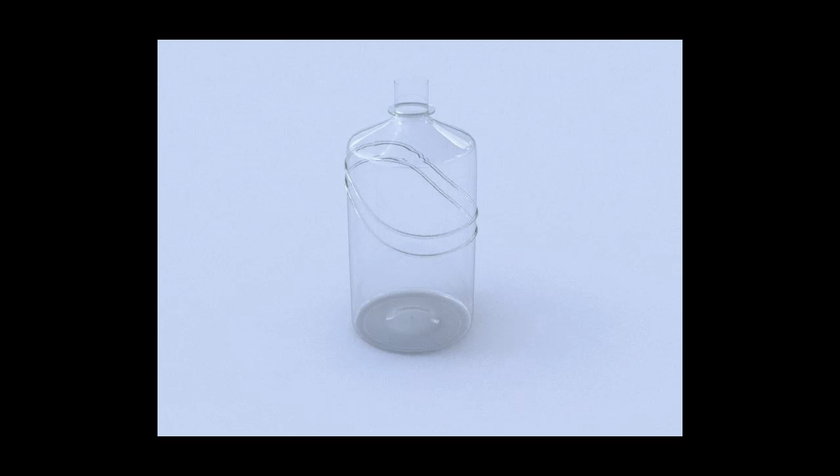Hi everybody, this time I will make a plastic bottle and some details into the side, using Revolve and Project commands at least. So let's start.

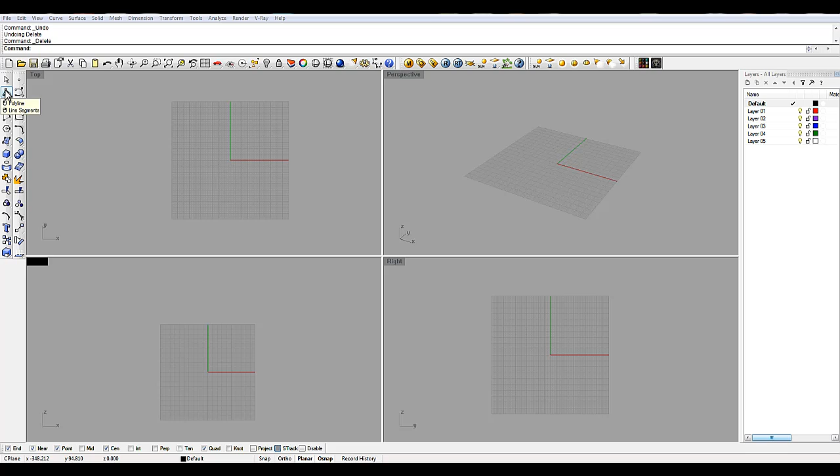Let's go into the front view and let's make reference lines. The height of the bottle will be 200 millimeters, and then we need the cap for the end of the bottle. I think 25 millimeters is fine, so let's put 12.5 here.

Okay, then we need a reference line of how wide the bottle will be, so I think it will be 10 centimeters, so let's put 50 here, like that, and press enter, and now you can lock these lines, and we can start making the lines. So let's start from here.

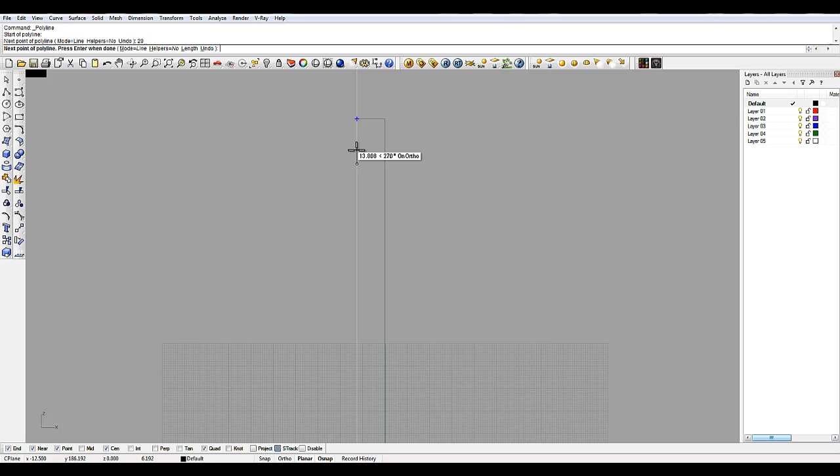So the neck where the bottle cap will be, I think 20 millimeters will be good. So press 20, and then the shoulder, or the end of where the cap will be screwed, I think it could be something like 5 millimeters. Of course you can use your own measures and make the bottle as wide as you like.

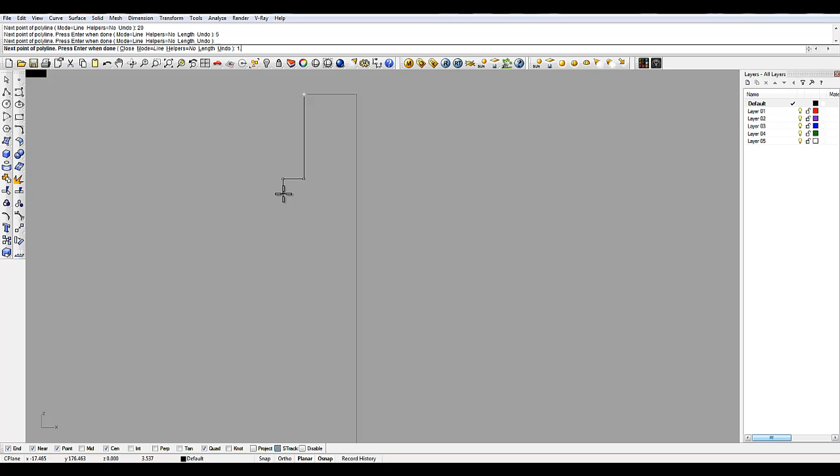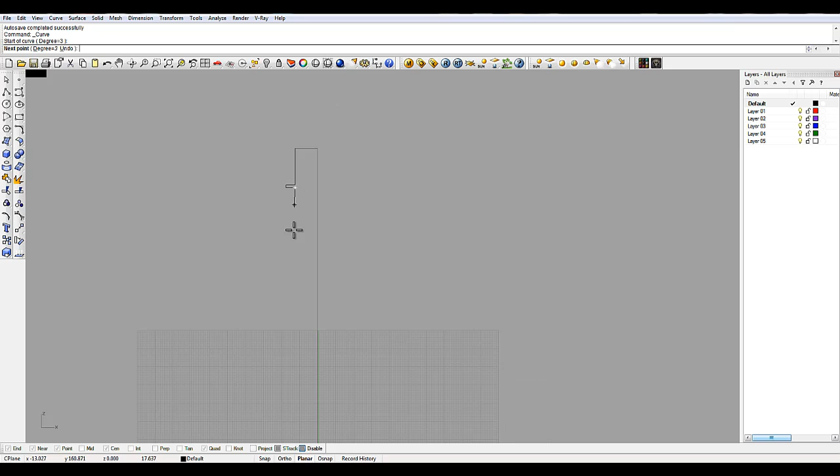And this part could be something like 1.5, like that. Press enter, select the control point curve, and from the end disable the snaps, and press shift for the first point. I think I'm going to make a very hard shoulder to the bottle, so maybe something like that.

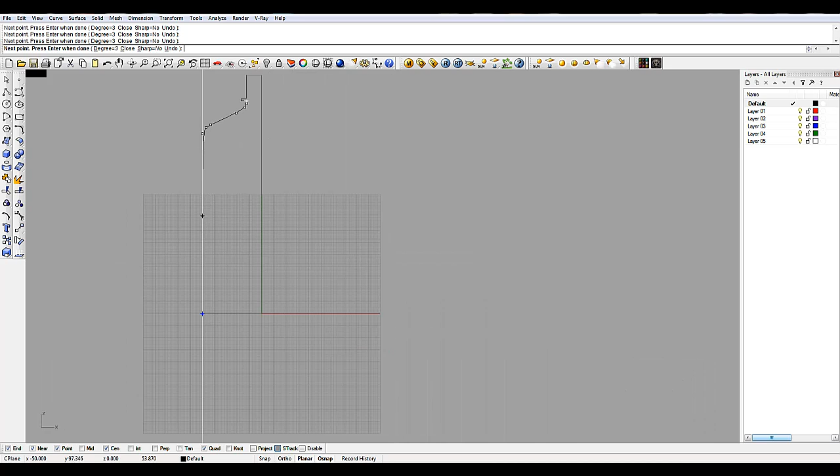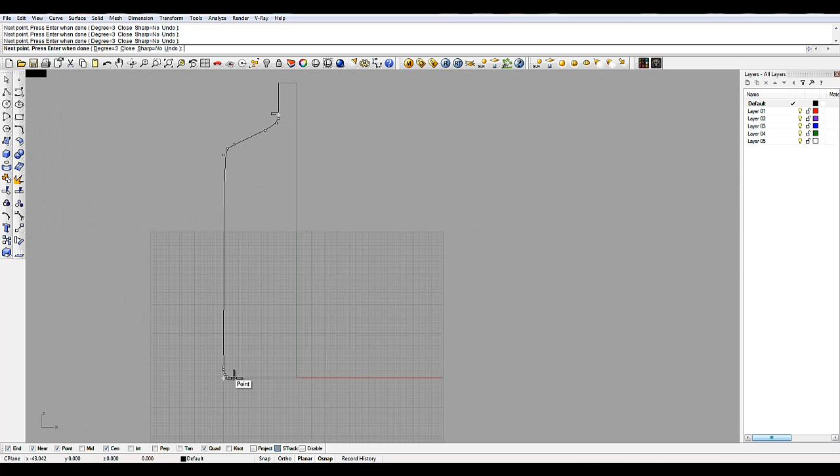If you have some bottle pictures you want to make, just use them. It will be much easier to make the shape. So I want a nice curve into the bottom, into the corners, so maybe something like this. This bottle will be ugly, but it's not the point of this tutorial, so I don't mind.

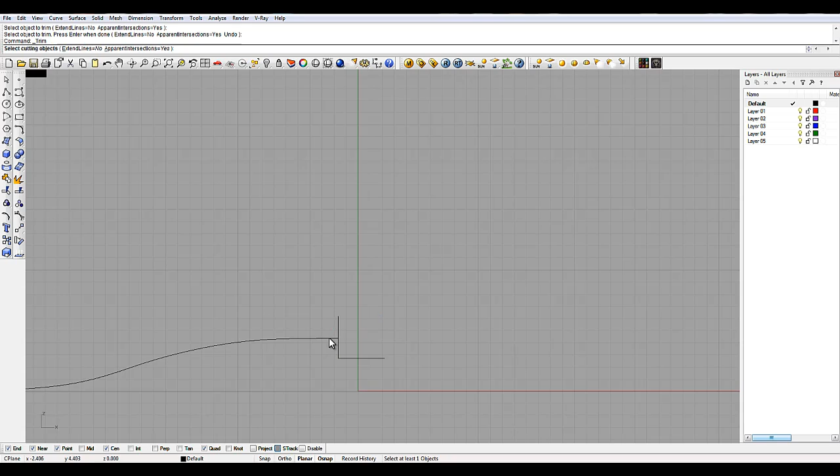Then you can make this detail which is related to the processing of the bottles. So there is this shape at the bottom of the bottle. I press shift all the time now, like that, and let's make maybe something like that. Then let's use trim. And again, like that. Oh yeah, we have to trim this one also. Okay.

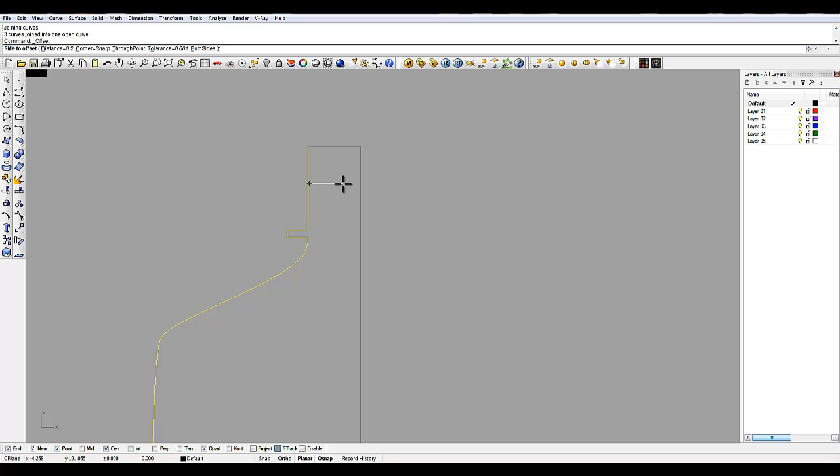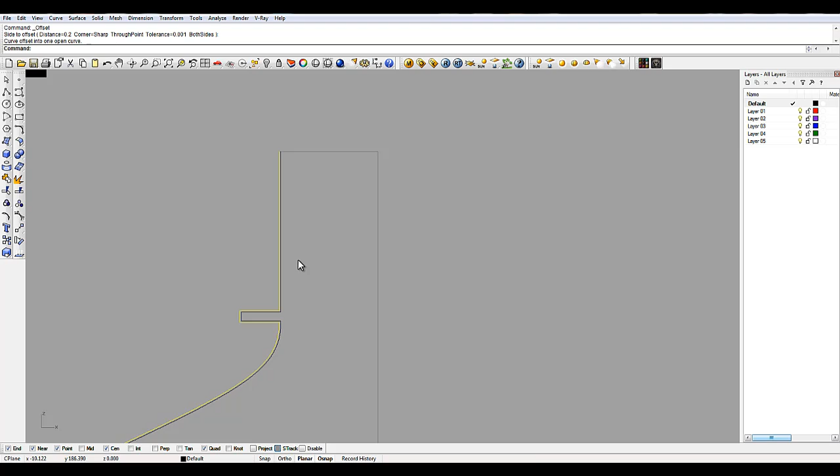Let's split this end off here and join these all together like that. Then select curve and offset curve, and if you want to make a really stiff bottle, use more distance, but I think nowadays plastic bottles are very flimsy when it comes to the material stiffness, so maybe 0.2 is enough. You can make a more stiff bottle if you want.

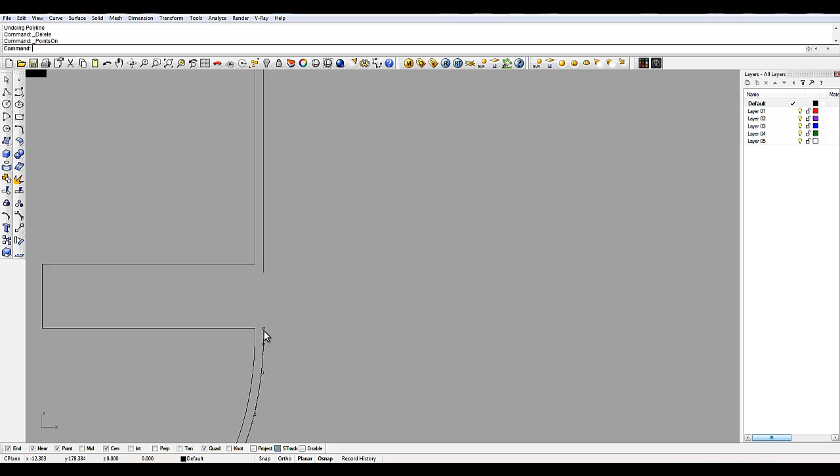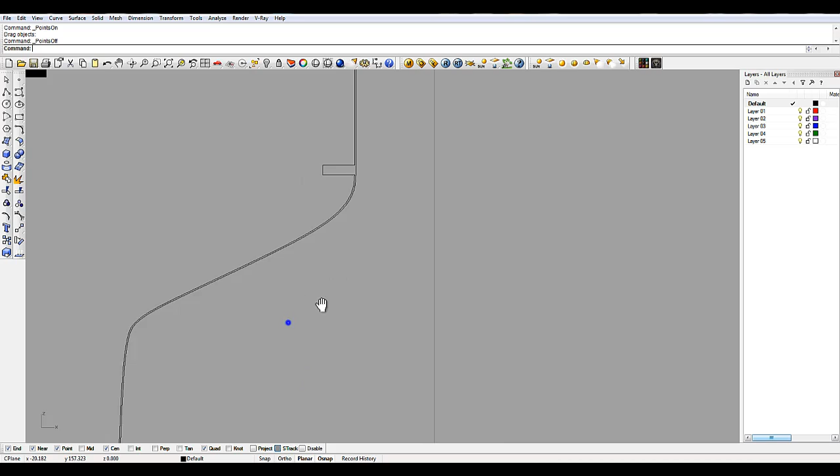And then we are going to explode this one and delete these, because this piece is solid all the way. The shape doesn't follow from the inside into this part. So let's see. We could also rebuild this, because like you see there are too many points in here. So maybe 50.

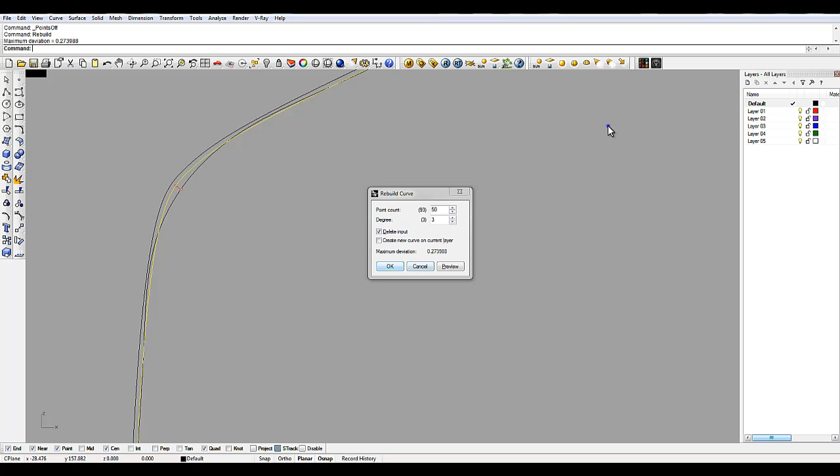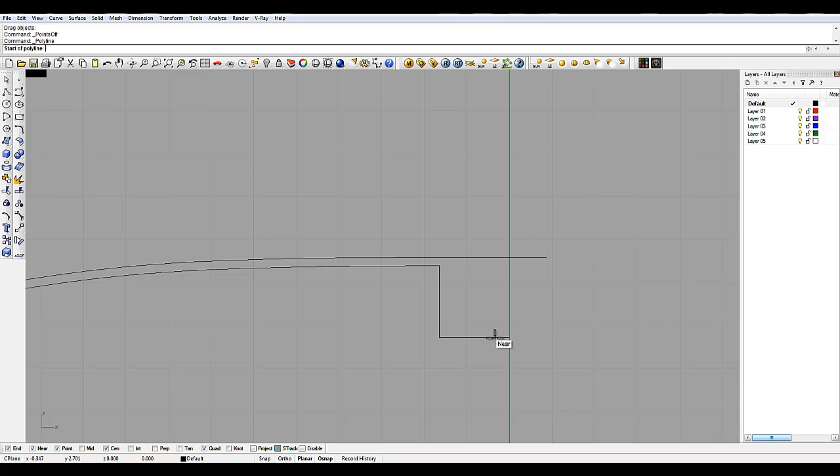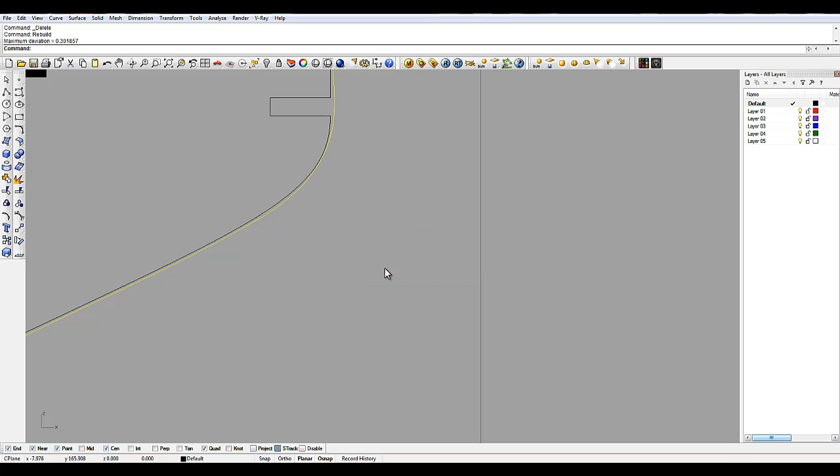And delete these ones first. Okay. Drag this last control point and split it like that. So now we use the rebuild command, and okay, let's try this. Maybe this 50 is okay. Then we can adjust this control point here.

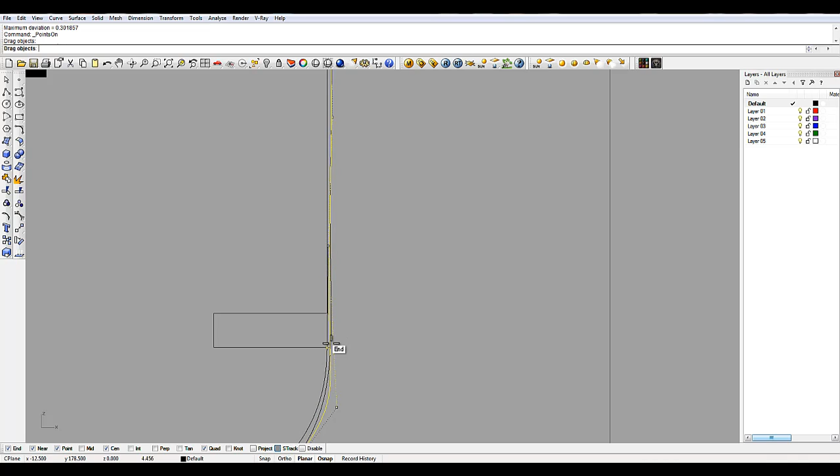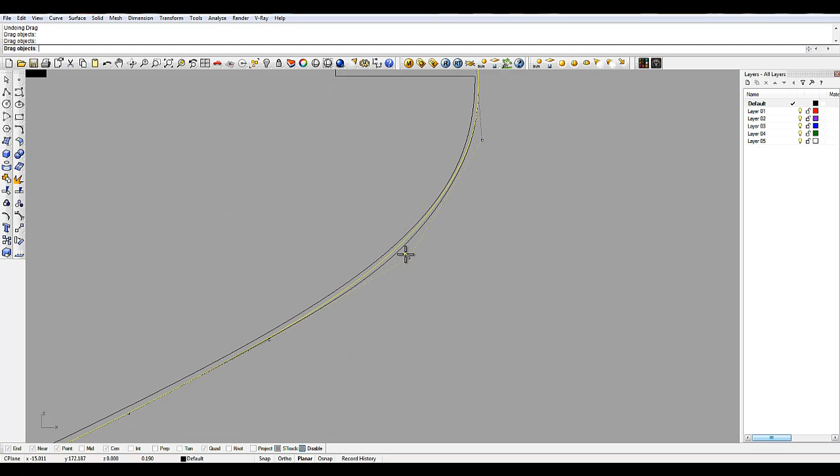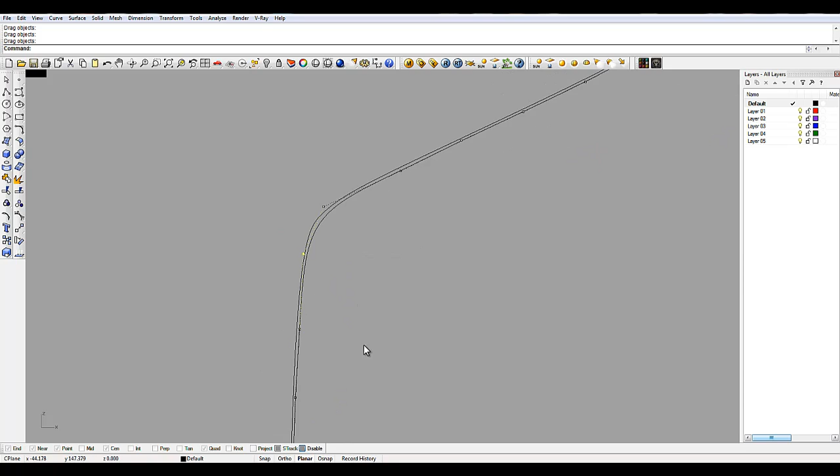So we have some problems here. Maybe it wasn't such a good idea. Let's not rebuild it. It doesn't follow the outer line so well if we rebuild the line, so let's leave it alone.

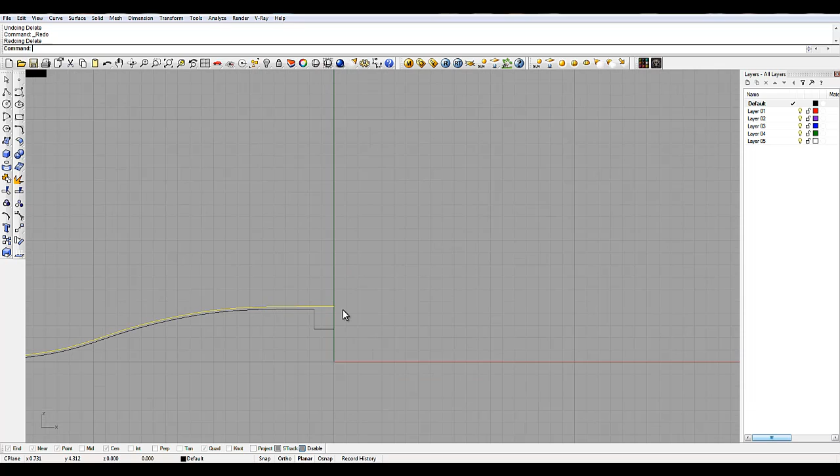So because of the detailing of the bottle, I think it's wise to make the outer surface and inner surface at different times. So let's select this inner curve and put it on a different layer and hide it, and put this here, and maybe we name this. This is not necessary.

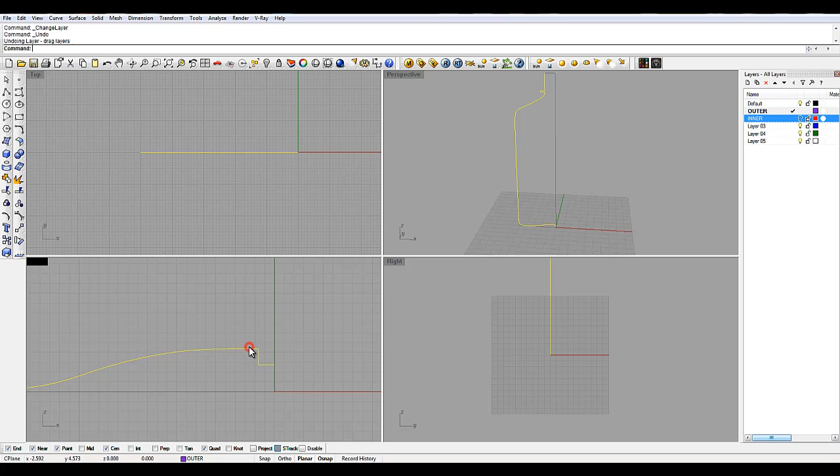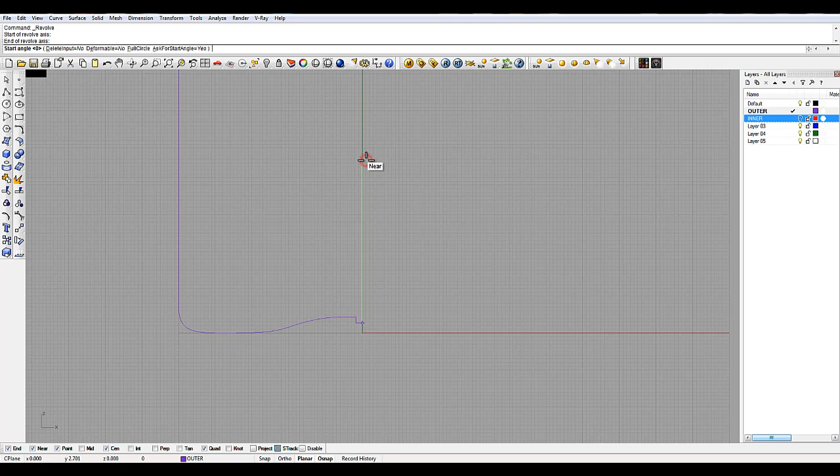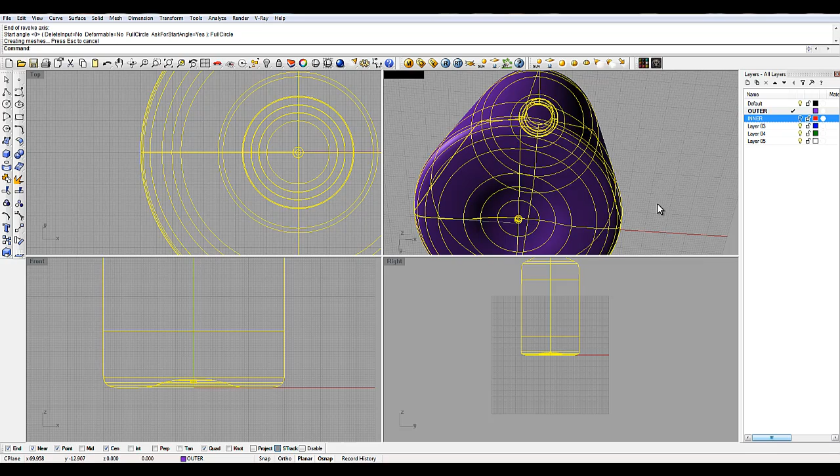So let's select this curve and use the revolve command and select the end of the line and shift and go up and full circle. There we have it. Not a very beautiful bottle, but it's not the point in this tutorial. So now we have this nice detail here. It comes when the bottle is extruded at the factory from a plastic piece. It leaves that little knot into the bottom.

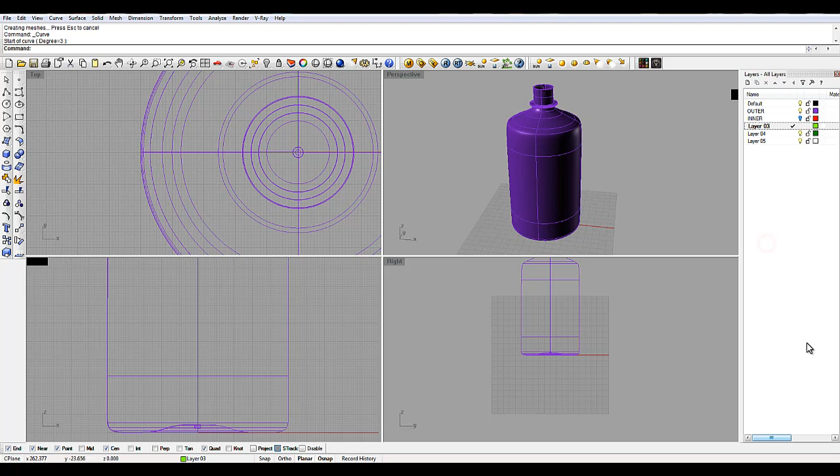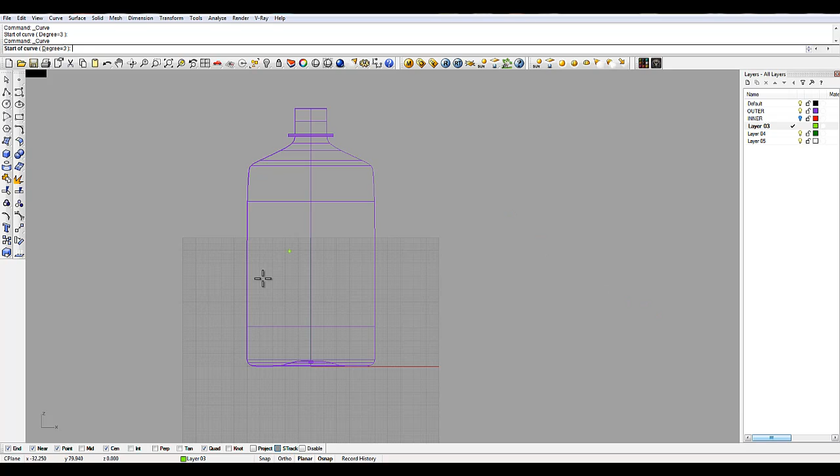So now we have the outer side and we want to make those swirls. Let's go into a different layer and again into the front view, and let's make some nice swirls. If you want to make a label on the bottle, you might want to leave some space here. So let's make a nice curved line here.

Like this. Maybe get that last point a little bit higher, like that, and then select the curve and okay, let's make two of these. I don't know the name in English, but swirl or swoosh or something like that. Maybe we could rotate this lower curve a little bit like this, so we get more of this wave look here.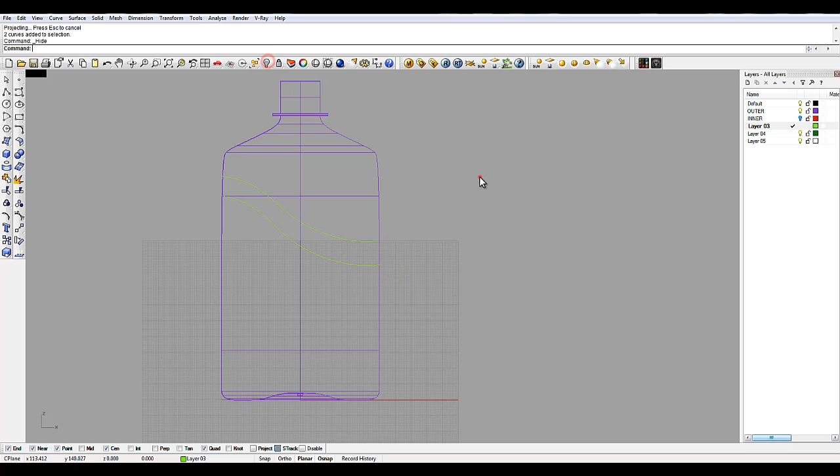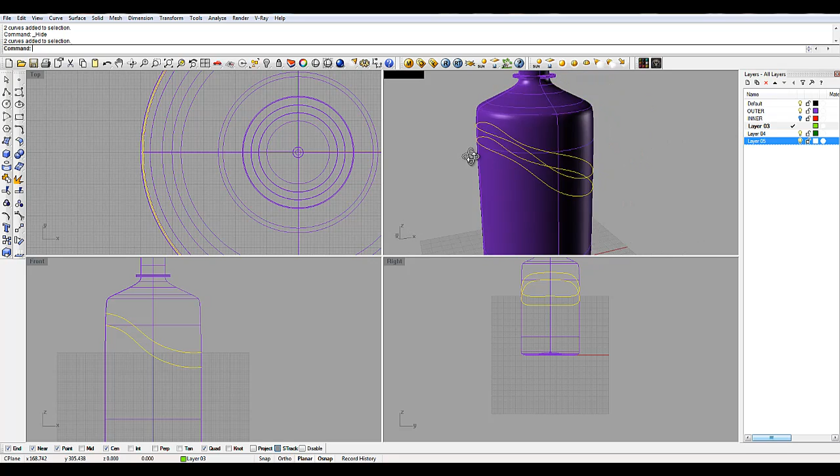So now you can select these outer lines and hide them, or make a garbage layer and move them there. So now we have these curves following the bottle side. If you want to make it more beautiful or something, you can move those curve points and then make the project command again. But now we are going to go forward and select these two curves and use solid and pipe. Oh, sorry, you can only select one, and it's your choice again.

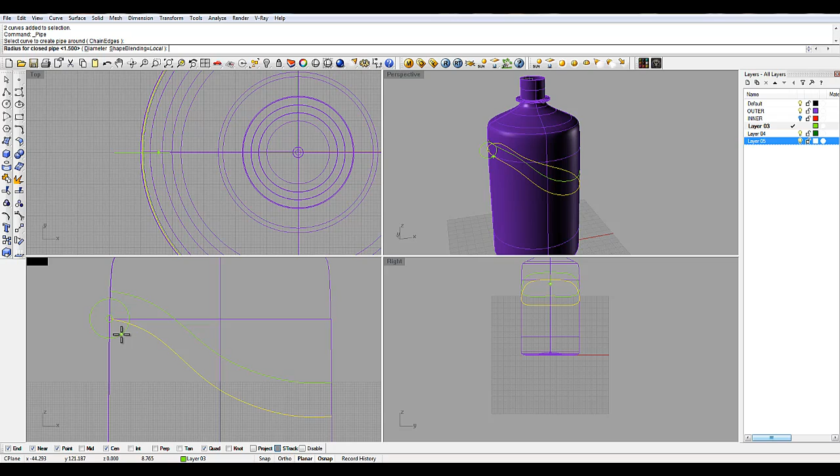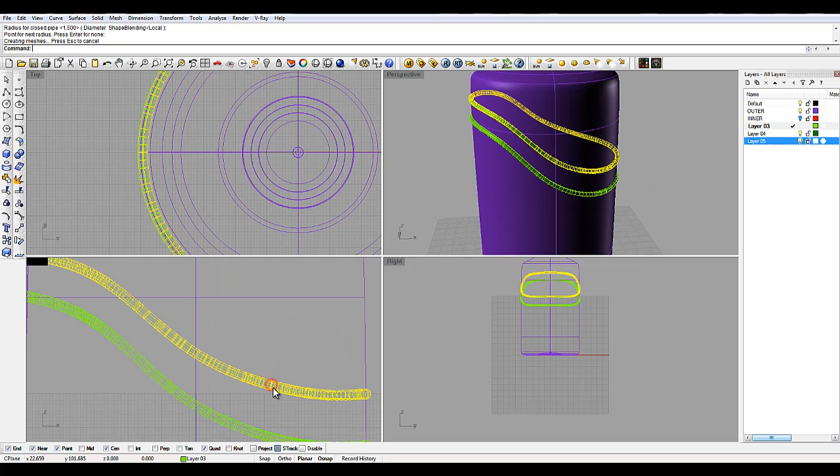I will use 1.5 for the radius for the pipe. Just press enter, and there you have it, the pipe, and mouse right repeats the command. Select the upper curve and just press enter. And there you have it. Let's select these curves and again hide them. And now if you would have made the inner surface in this point, it would be more difficult to make this next part of this tutorial. So we are going to use split command to split these pipes and this surface and then join them together.

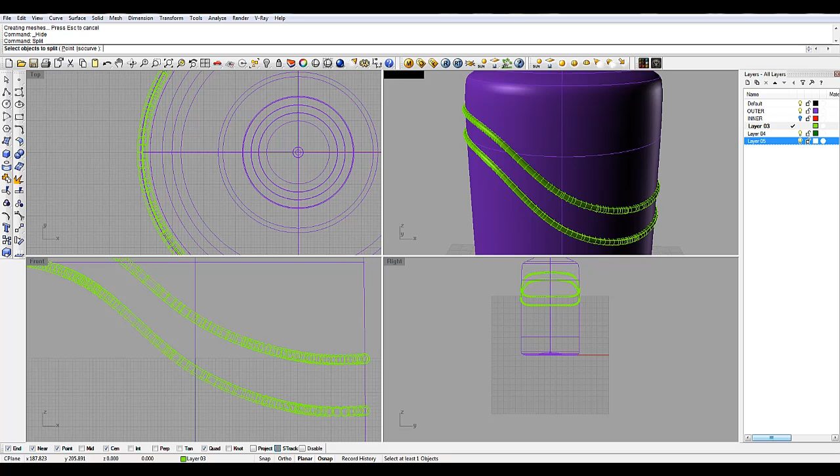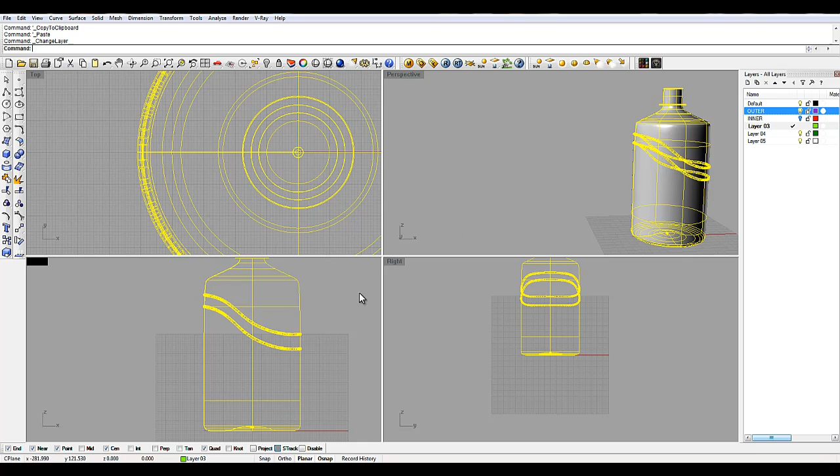So we have the pipes now. Let's choose all these, the bottle and the pipes, and copy and paste. Then move them into the white layer, and now we start splitting. So use the command split, select the green pipes, press enter, select the bottle, press enter, and do the same with the bottle. Select the bottle and then select the white pipes because they are still solid pieces, and press enter.

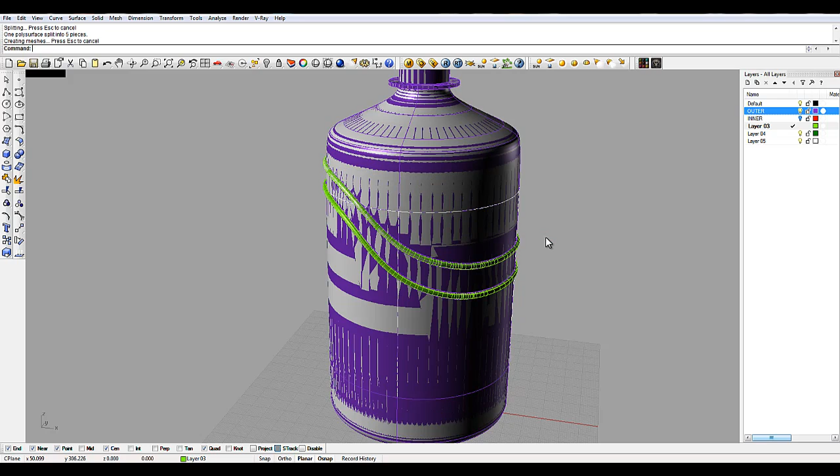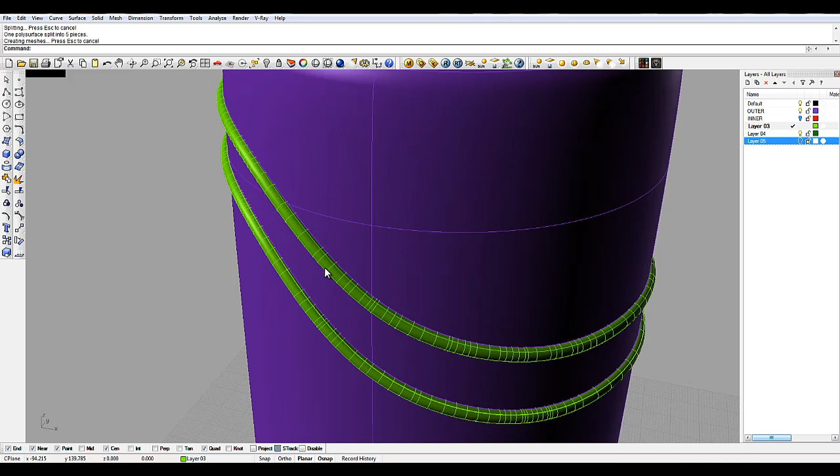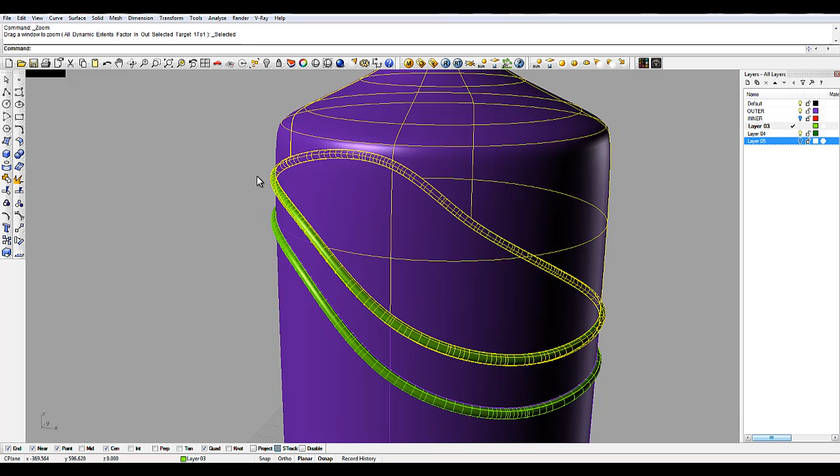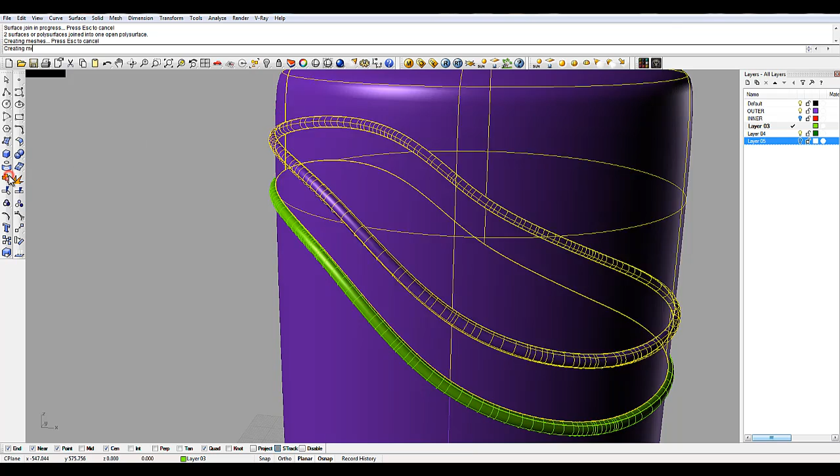And then you can hide those white pieces by pressing the layer off, and now we are going to join these pipes into the bottle. As you can see, they are now in pieces, so this is a little bit tricky, but I think we can manage. So select the upper pipe and the bottle and press join. That went nicely. Yeah. Then select the lower part and the upper part and join. And that's okay also.

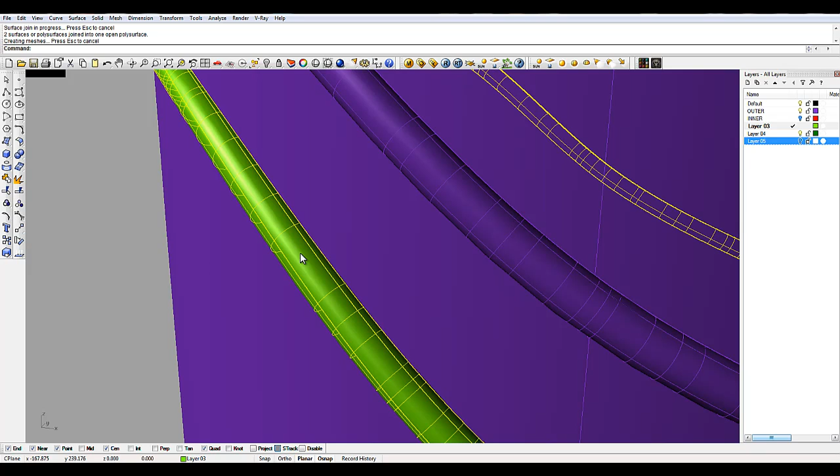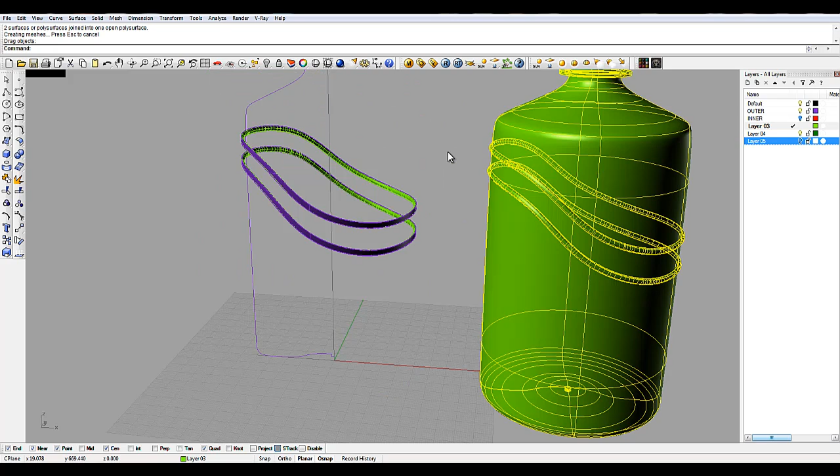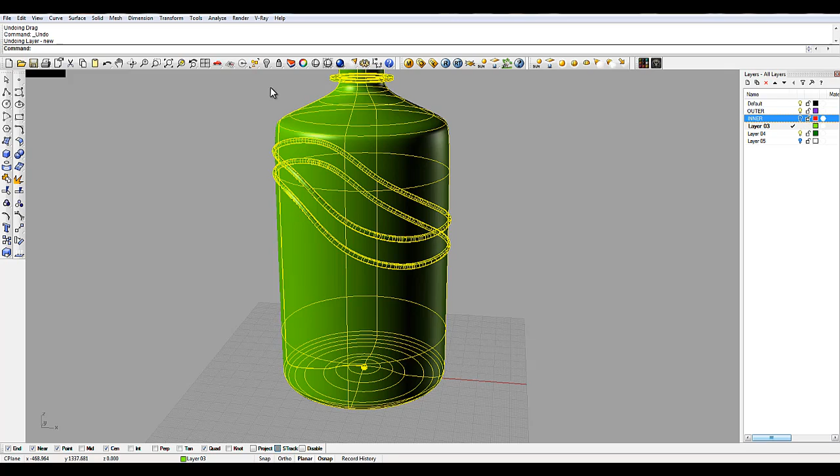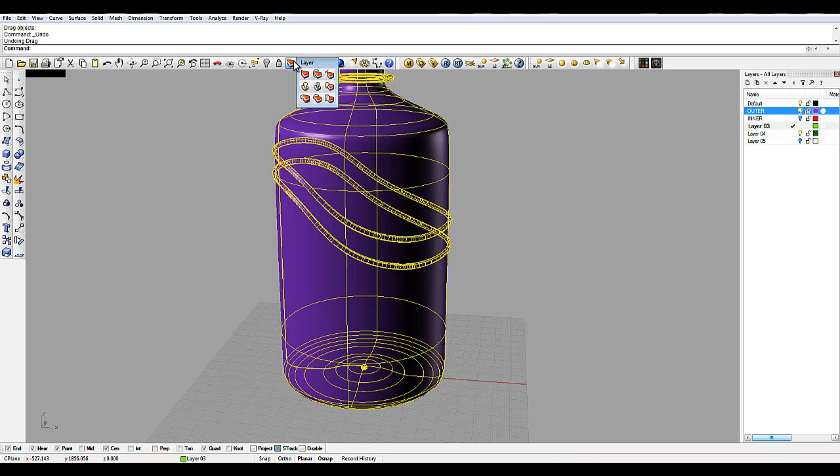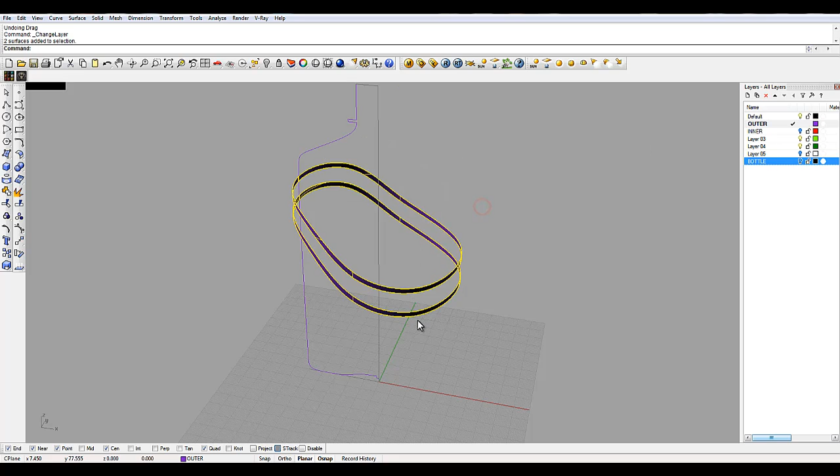We can make a... let's just move this bottle into the layer called outer, and we can delete these and, okay, there is some, so let's select this bottle and make a new layer, call it bottle. Okay, let's press OK and go into the bottle layer and, sorry, let's hide the bottle layer and select these pieces and delete those and hide that layer. And now we have to make the inner surface.

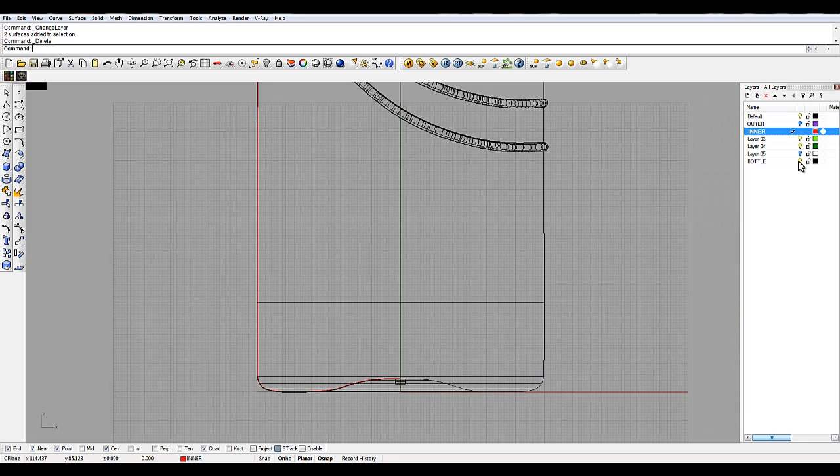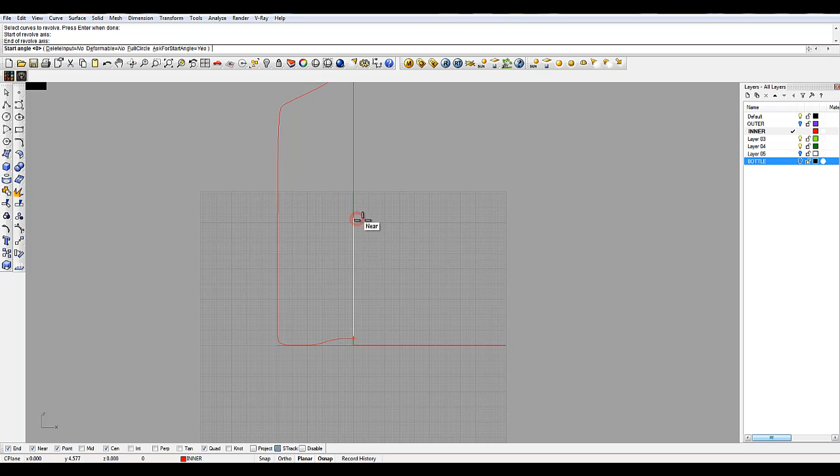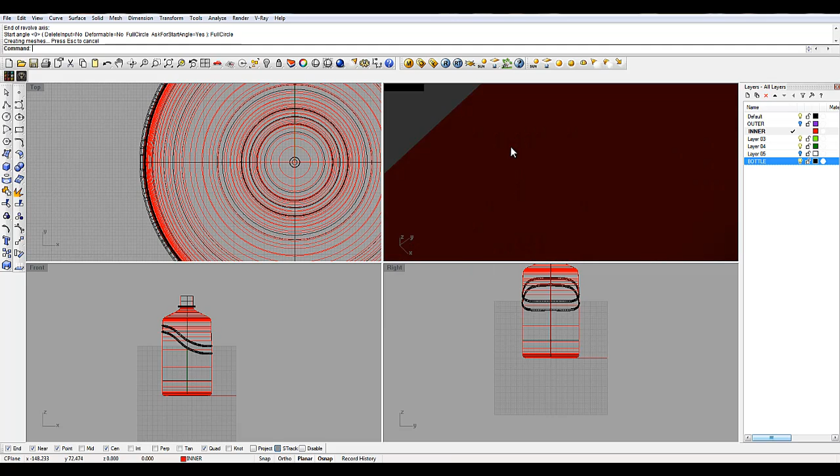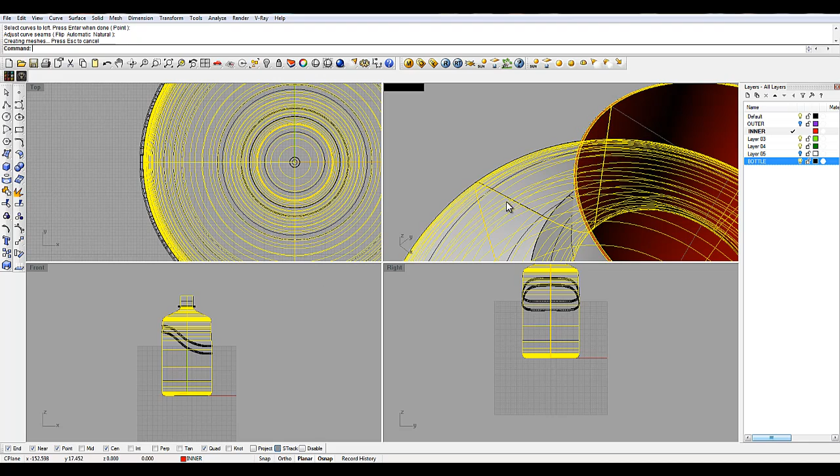So let's go into the inner surface layer and select the curve, and use the revolve command again from the end point and press shift and drag the mouse up and full circle, and there we have the inner surface. Put the outer surface on, the bottle on, and I think it should be fine if we just loft this part here. Okay, and select the surface and the loft we just made and the outer surface and join. And there you have it, closed polysurface.

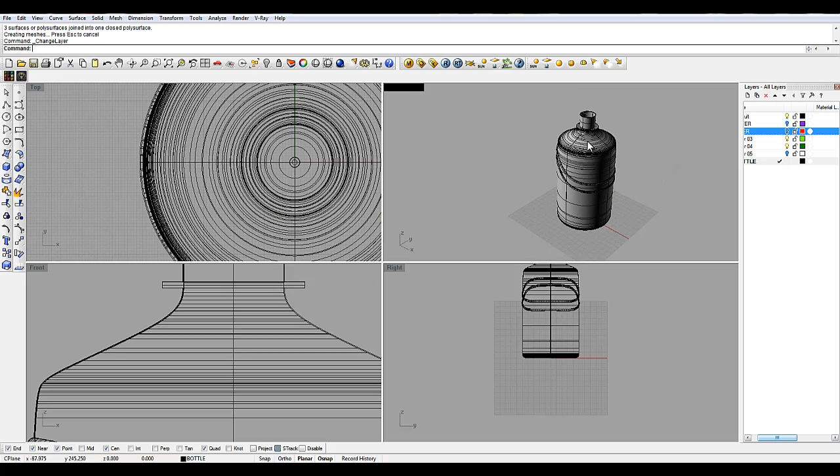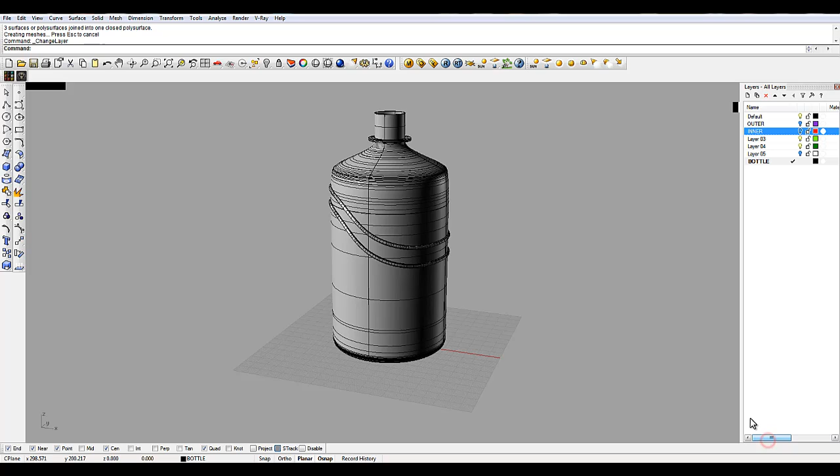And let's move this into the bottle layer like that. And there you have it, a bottle with the swirl or swoosh or whatever it is called, this detail. So maybe I just put some material in it so we can see how it looks. I select some clear plastic. Or maybe I just choose a glass for this because it's only for the preview.

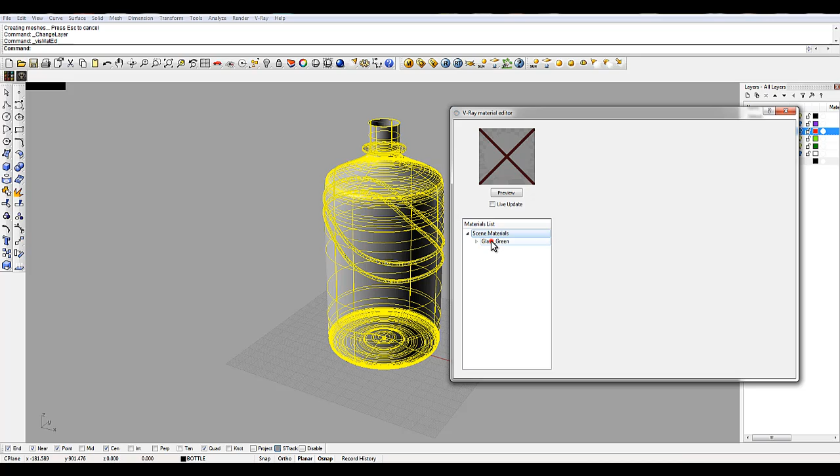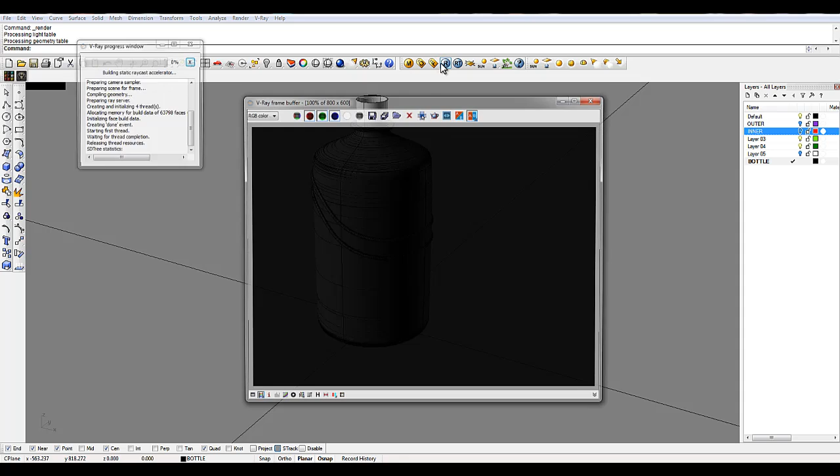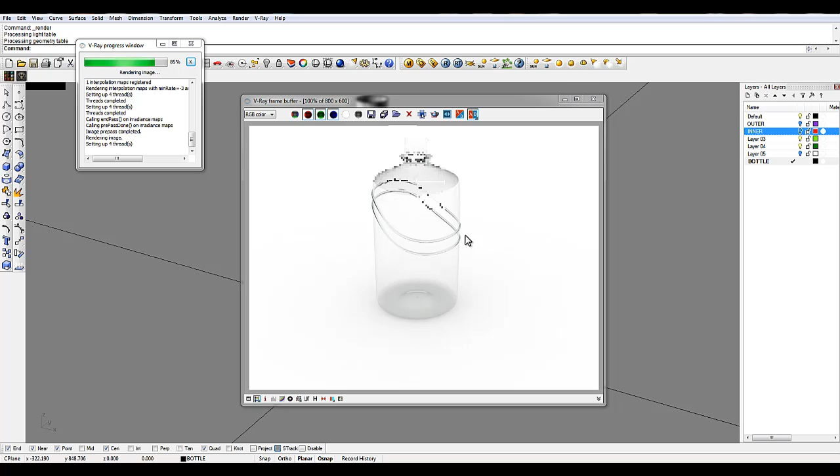So like that, and let's make infinity plane and let's try it. I haven't changed any render settings, so this might be looking weird. Of course, plastic would not be so reflective. Okay, let's change the settings a little bit.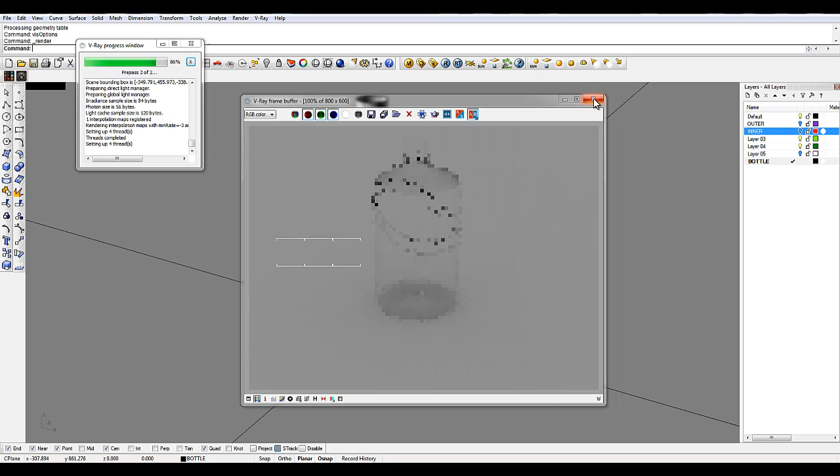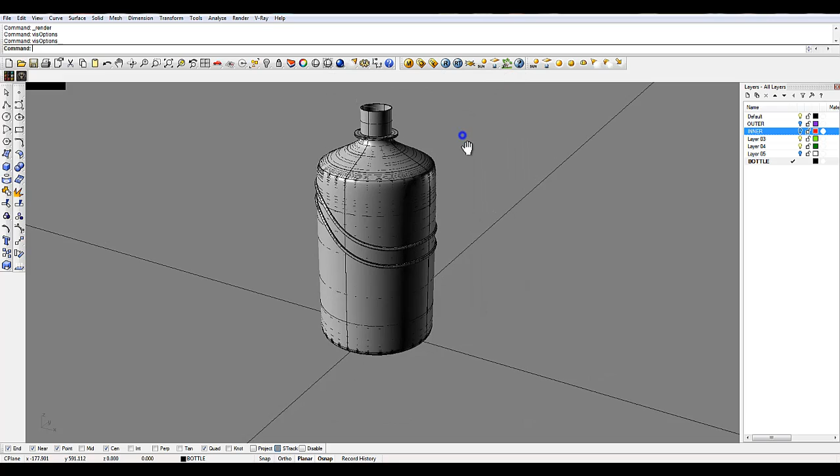I'm just going to make this really quick, so I choose this sky picture HDRI. Let's try this out. Let's change the camera a little bit. Lower settings. So what do we have now? Okay, it has too much.

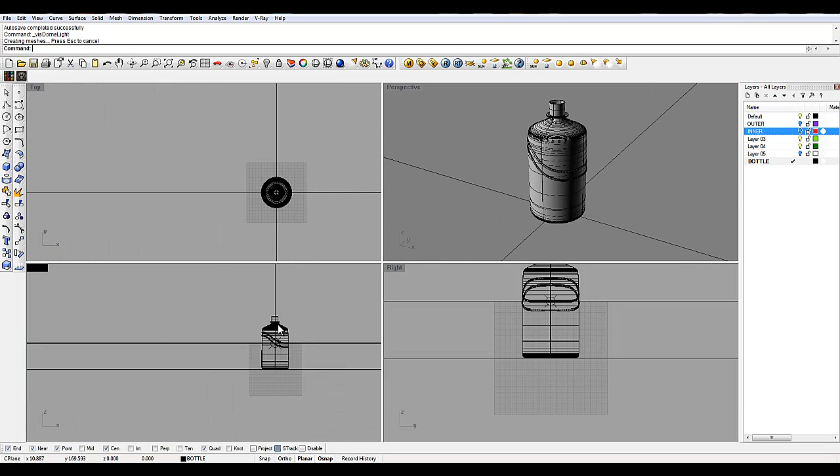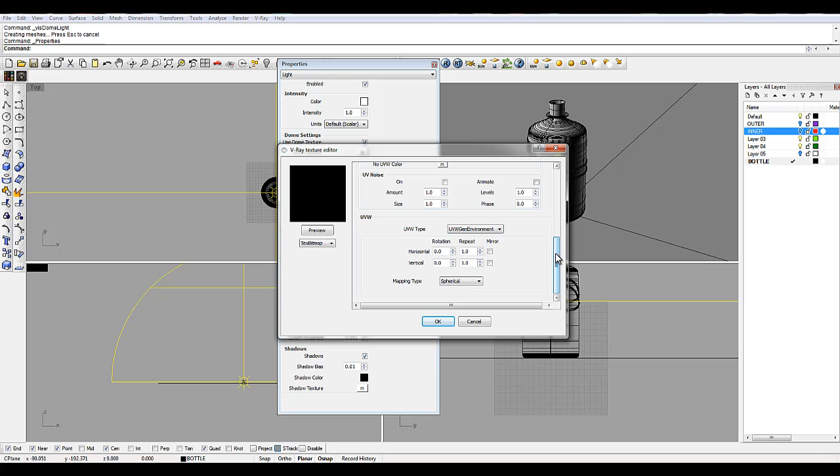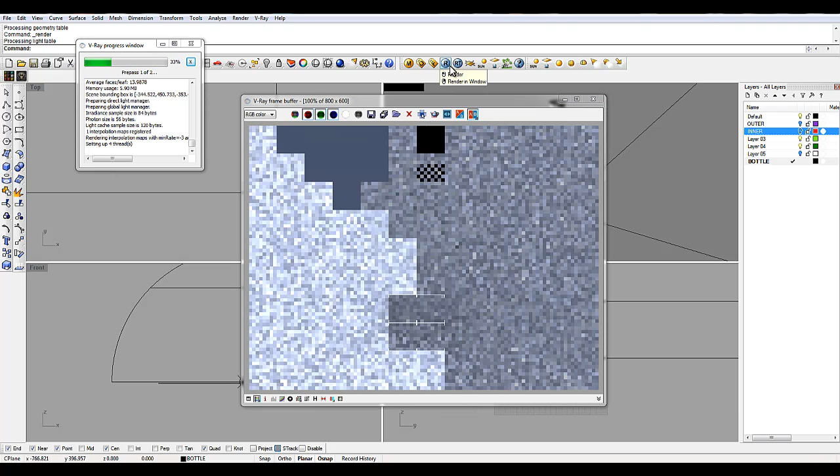That's too much. I made a dome light and I will put a bitmap into it and change it to spherical and press OK, and let's see if we need more light. Yeah, we could put something like 2 or 3. Okay, maybe now. So there you have the final result of the bottle.

If you want to make more details, like the place where the cap will go when you screw it, you can use the same technique, project, and things like that. You can maybe use this helix to make the curve, and then use the slab. It makes this box looking solid piece.

Okay, this was the tutorial on how to make a bottle and these pretty complex details into the side. And if you want, because we have outer and inner part, you can make realistic renderings if you make a piece inside of the bottle and put some water or wine texture in it. So, hope you like it and learned something new.